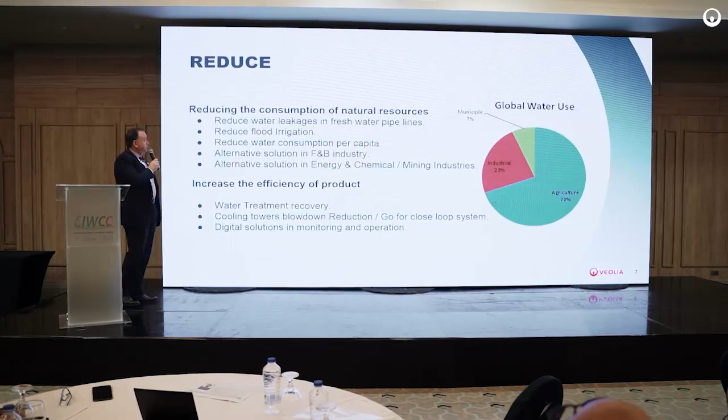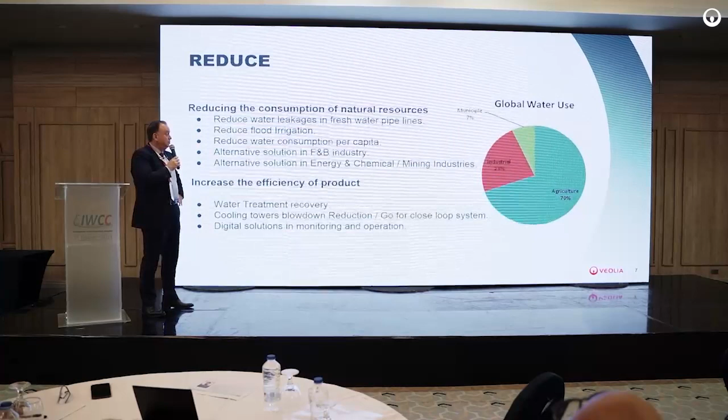So reduce, this is the old concept of water reduction, to reduce water consumption in the environment. So we have the old concept that there is a huge reduction if we stop the water leakage in the pipeline. If we use flood irrigation, we go to other technologies in irrigation, and reduce the water consumption per capita.

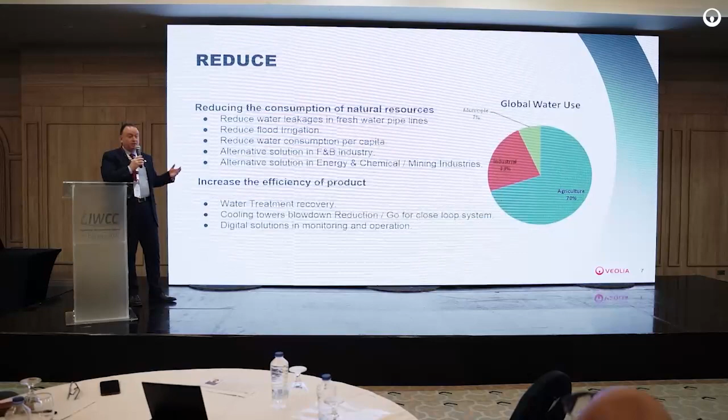There was a lot of discussion at the beginning of this seminar about where to go, 300 liters per day for a person or 150 liters per person. This is a major consumption of water.

Alternative solutions in the food and beverage industry, especially if we go to this chart, we will see that agriculture is consuming 70% of fresh water. Also, alternative solutions in energy, that is the oil and gas industry, chemical and mining industry, which is around 23% of global water use.

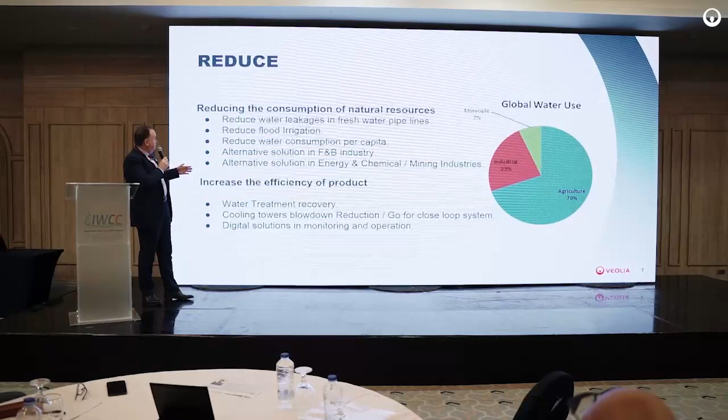So how can we increase the efficiency of the product? We are talking now about the development of membrane technology; we can now go for high recovery RO membranes, with which we can achieve around 90 to 92% water recovery.

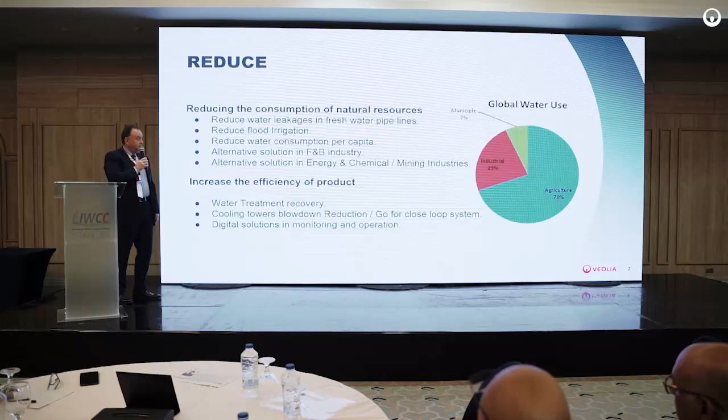One of the examples, which also has a huge consumption of water, is the cooling tower blowdown. With new technology, we can reduce the cooling tower blowdown, or we can go for a closed loop system. So this is another type of water reduction.

Now everybody is talking about digitalization. Digitalization is a good solution to monitor and to reduce water consumption. Next slide, please. Actually, it should be reuse, not reduce.

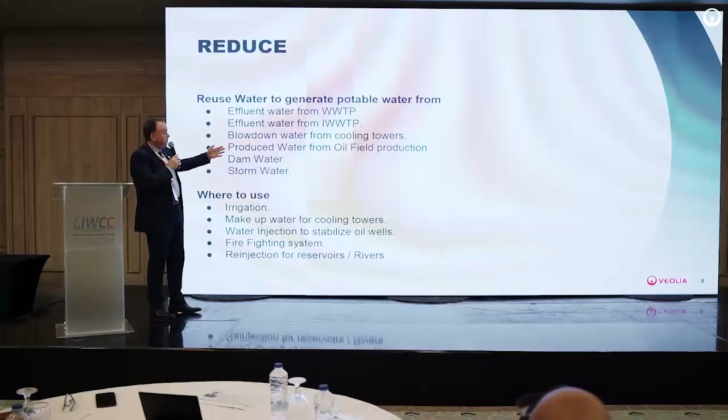So we can reuse water to generate potable water from a wastewater treatment plant. Municipal waste can be retreated to be used as potable water. Industrial wastewater can be treated to be reused. The blowdown from the cooling tower. I'm insisting on cooling towers because our area is a hot area, so using cooling towers in industry has a huge consumption of fresh water.

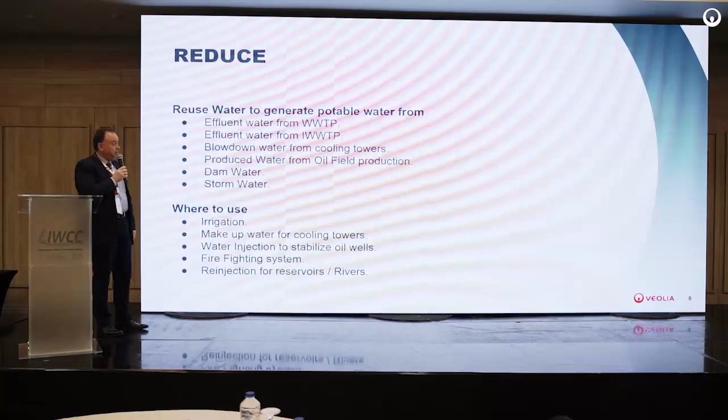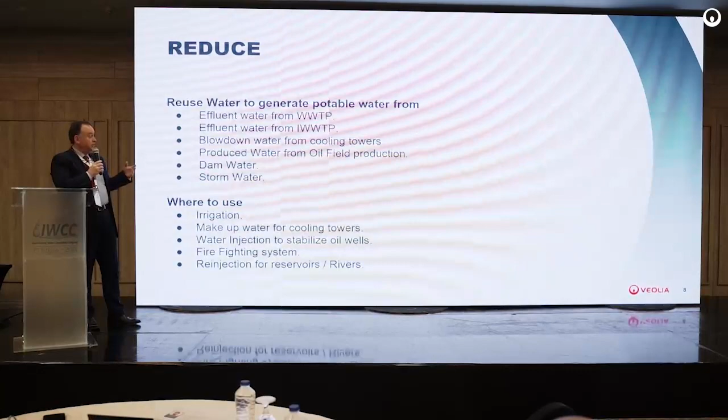So now, produced water from oil fields. As we know, the water cut for oil production is increasing. In some areas, the ratio between 1 barrel of oil and produced water is 1 to 4 or 1 to 7. So imagine if you are producing 10 million barrels of oil daily, you have around 40 million barrels of produced water you are wasting. So we can reuse this water in oil field operations.

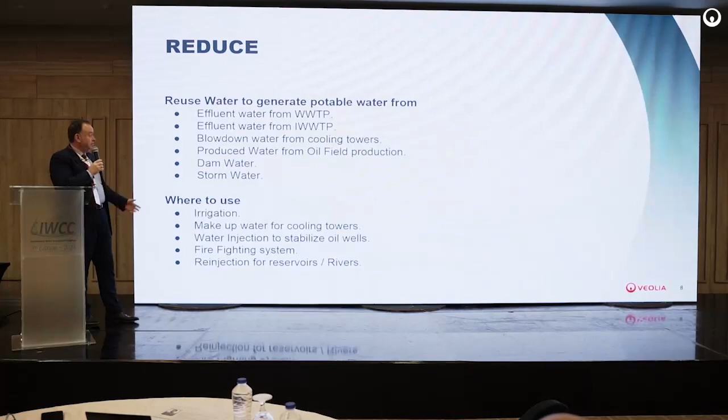Dam water is a good source of reused water. I'm coming from Saudi Arabia, so imagine, Saudi Arabia has huge dams, so they started treating the dam water to be reused as potable water as well.

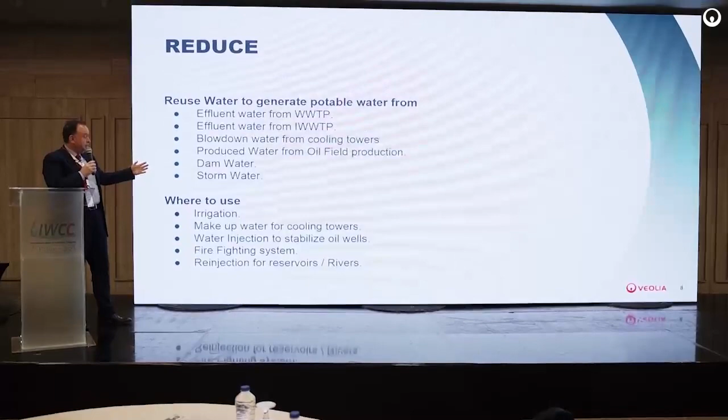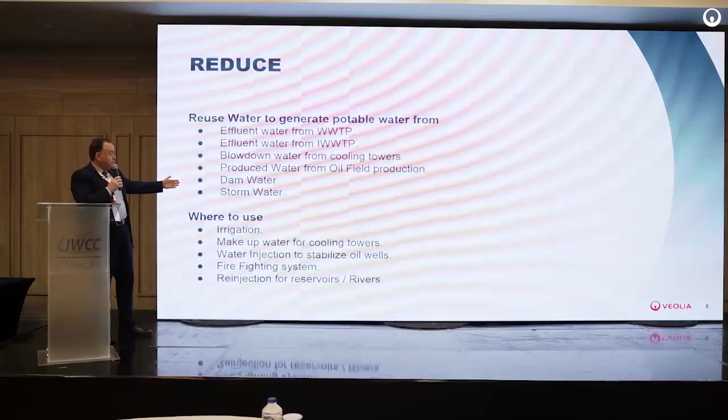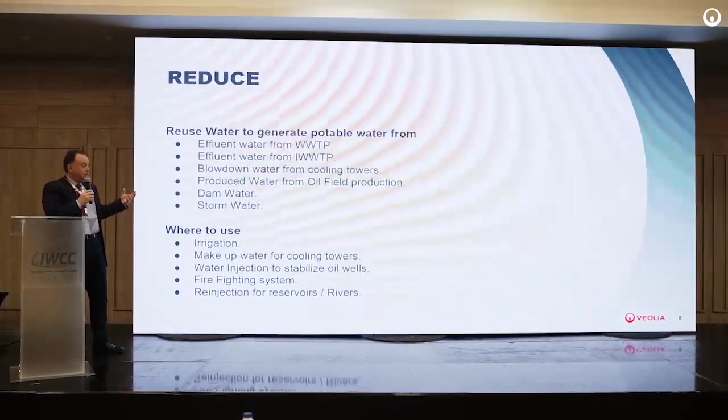Storm water, the collection of storm water, is also a source of reuse as potable water. So for the new development of cities, you can design the storm water collection system in such a way that you can collect, treat and reuse it as potable water.

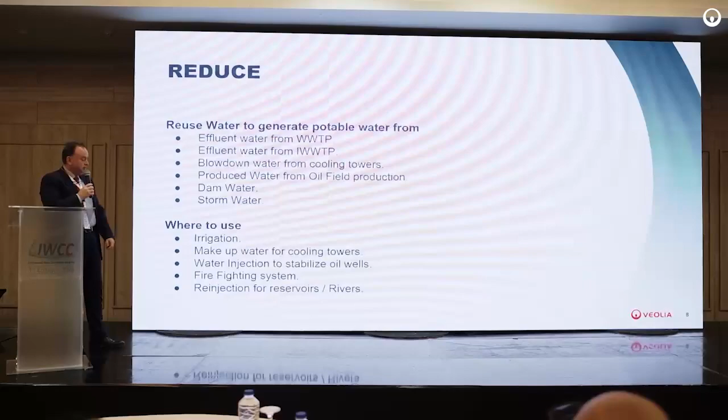We can use water in irrigation, as makeup water for cooling towers, water injection to stabilize oil wells, firefighting systems, and re-injection for reservoirs and rivers. Next, please.

So the new development in water reuse, we are talking about recycling. And by recycling, we want to achieve the zero discharge concept and introduce it in the municipal and industrial sectors. We will go through the difference between reuse and recycle in the next slide. But by recycling, we are re-inputting the water in the same cycle inside the same plant.

So we are not using fresh water to, for example, generate drinking water. We are using the industrial or the municipal water. We are treating it, then we can reuse it back as feed water for the demin plant, or as feed water to RO plant.

Also, the brine can be further treated through ZLD, zero liquid discharge, to have salt extraction. The new concept here, using the brine water from seawater desalination, is lithium recovery, which is a big subject nowadays.

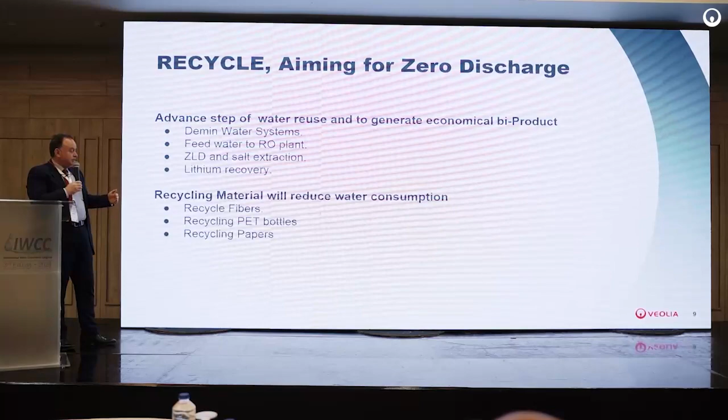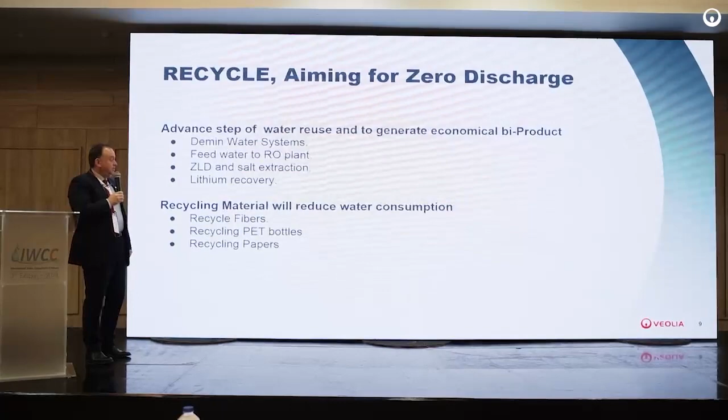Recycling PET bottles: you can also reduce water consumption by recycling PET bottles. Recycling paper. So we have two steps: recycling the water itself and recycling the solids, by which, by default, you are reducing water consumption. Next, please.

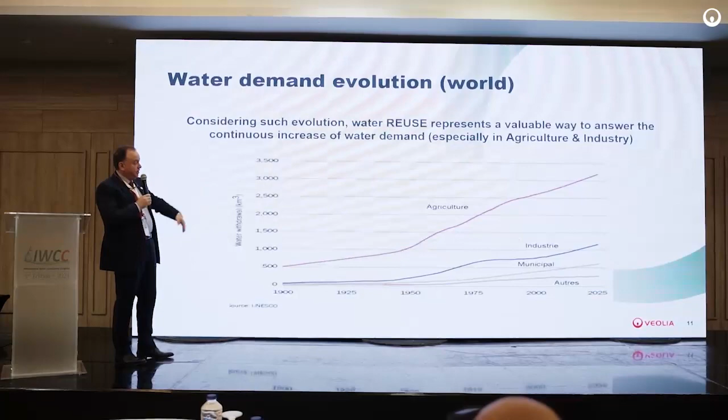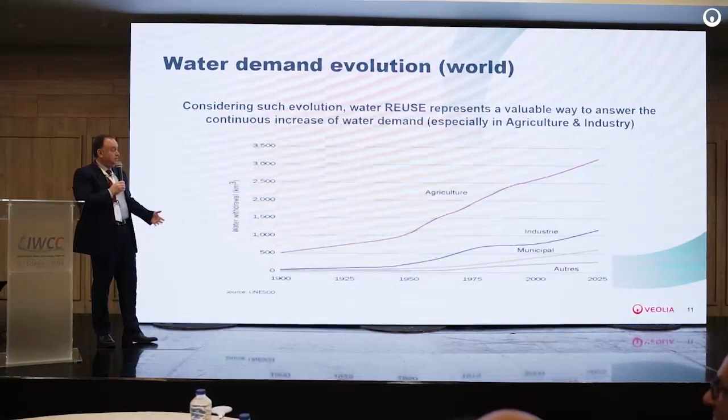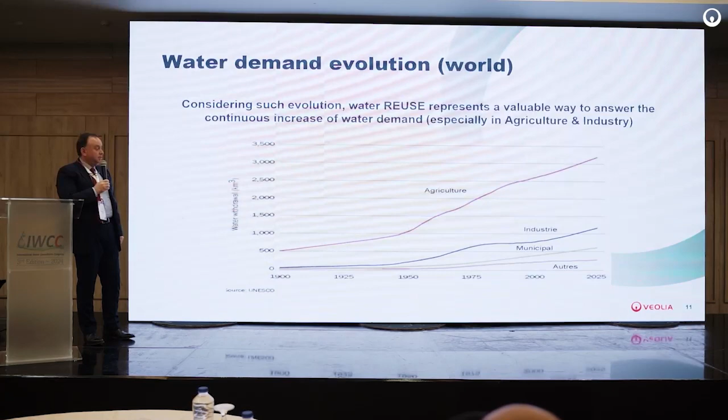So the natural resources are limited, and we have to find other solutions to introduce fresh water for agriculture or industry at least. Next, please. Especially when we are talking about the Middle East, it's a risk area for water shortage. So if we go for the concept of water reuse, we are reducing the impact on fresh water consumption.

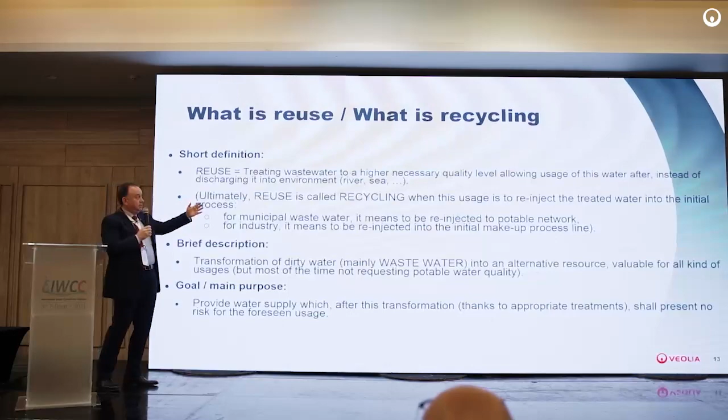Next, please. So this is the general definition. What's the difference between reuse and recycle? Reuse is treating waste to a higher necessary quality level, allowing use of this water. In recycle, we are not at the final discharge. It will be recycled back again and again.

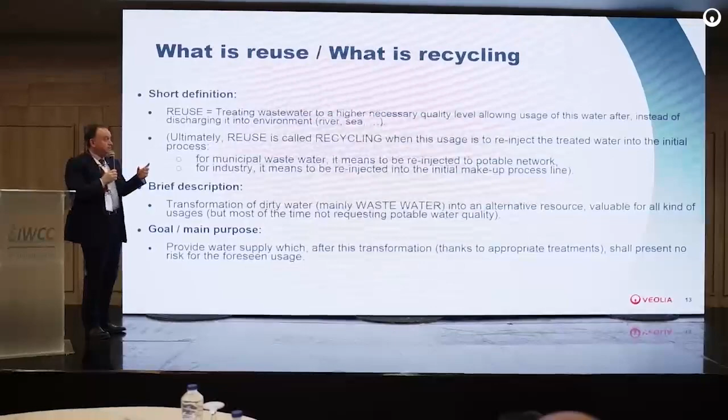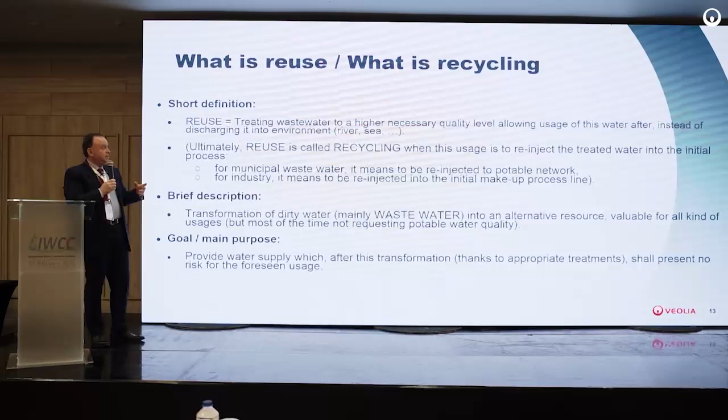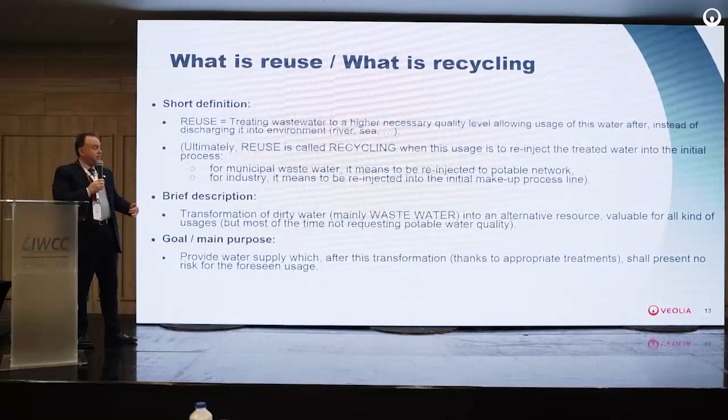So in reuse, for example in wastewater treatment, we are using the treated effluent for irrigation. But in recycle, we go for the next step, a further grade of treatment, to have the water recycled not once or twice, maybe 3-4 times.

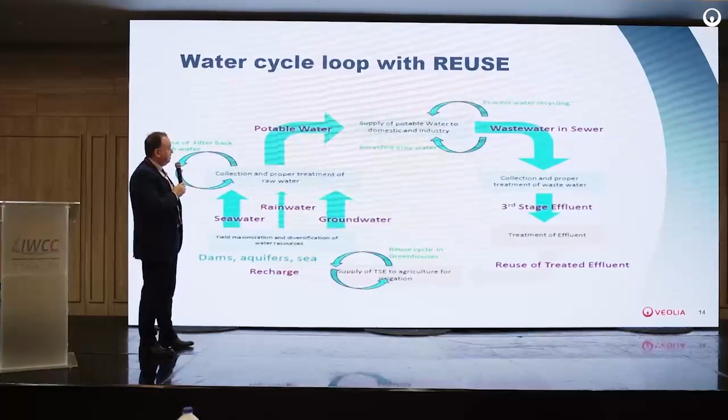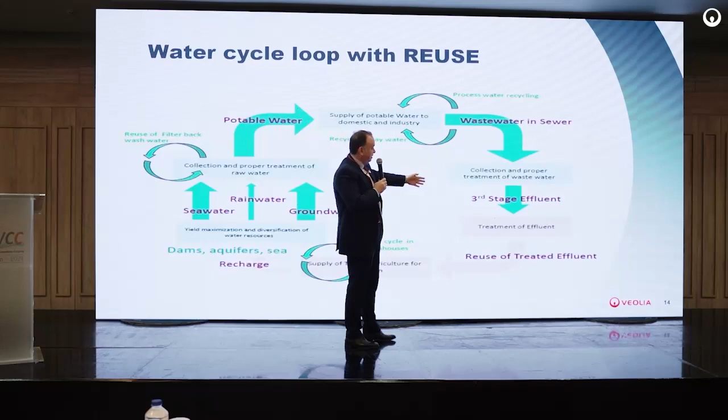So this is almost the cycle of water. Here, for example, from the wastewater treatment plant we are using grey water. The processed water can be treated so you can send it back to the potable water system. From the wastewater treatment plant, we can collect treated water to be used as a third stage in the industrial system. So it's a complete cycle of water reuse.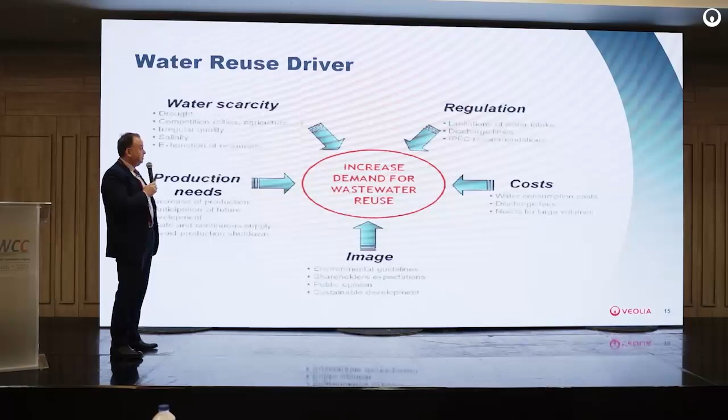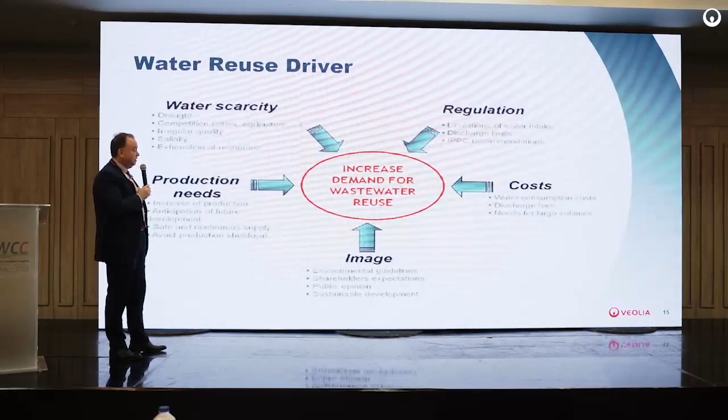Three minutes, please. Okay. So, water reuse drivers. We have water scarcity; this is one of the major drivers. Production needs have increased, as we explained in the previous slide. There is an increase in agriculture, industrial, and municipal regulation. So if there is a regulation, water reuse will be a must.

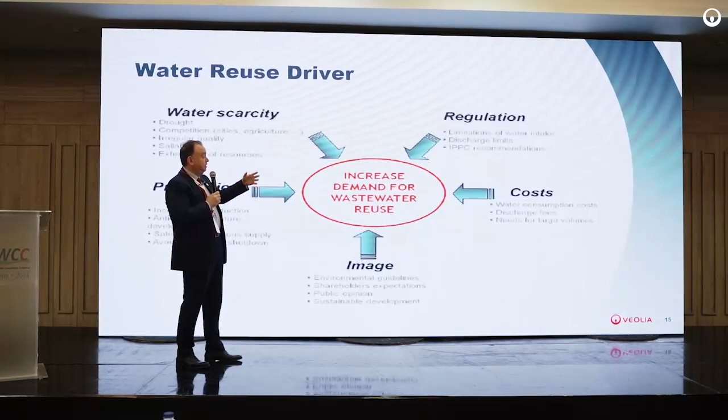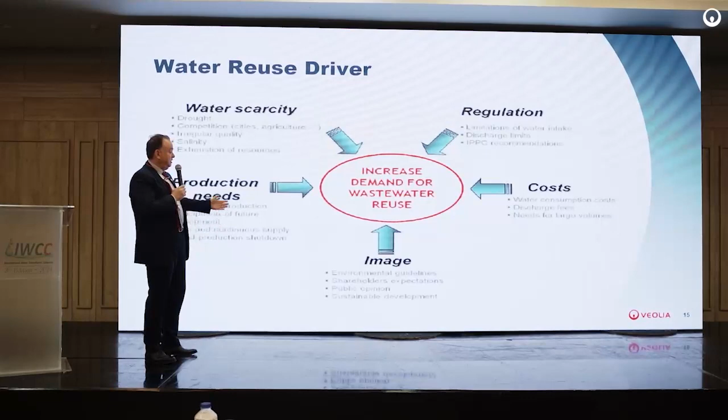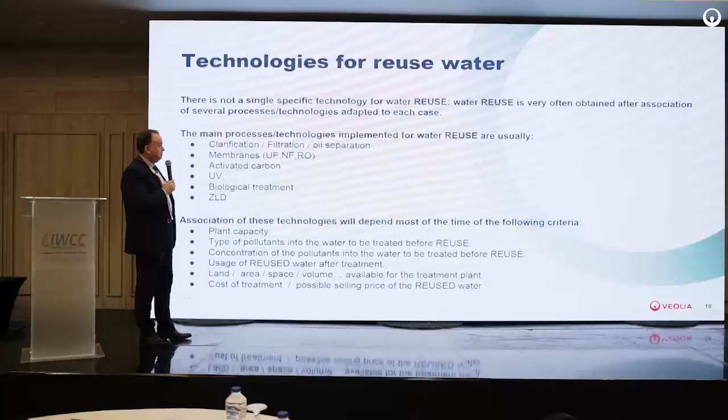Next, please. Next. No, not this slide. Please.

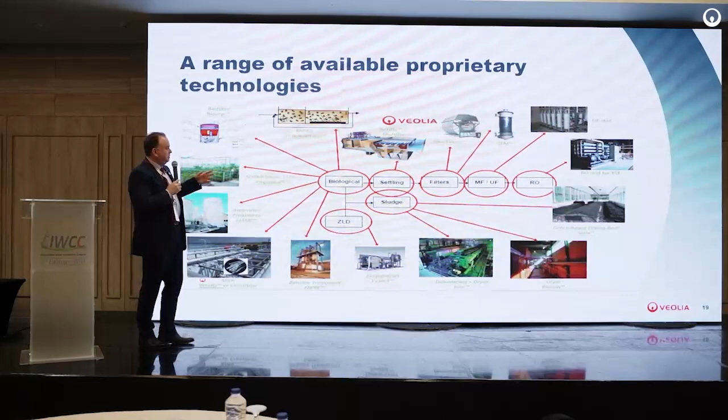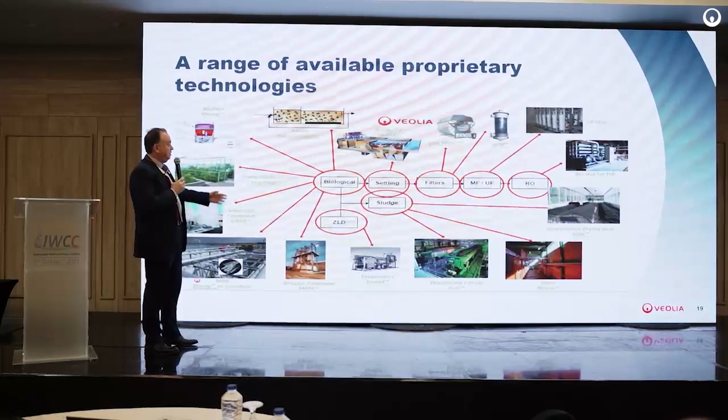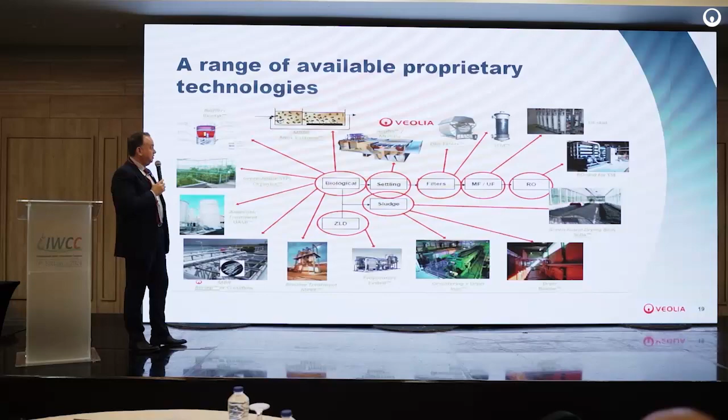Next slide. So these are different technologies for water reuse. We have biological treatment, settlement, filtration, ultrafiltration, RO, sludge treatment, ZLD. These are general technologies which Veolia can introduce for different steps of reuse and recycle projects. Next, please.

If you have your own recycle system, you don't have any operational risk if you face any shortage of water supply or flooding. Also, regulation is very, very costly. I know some petrochemical complexes have been stopped in operation, with millions of dollars in penalties each day, because the water discharge was not matching the requirements. Next, please.

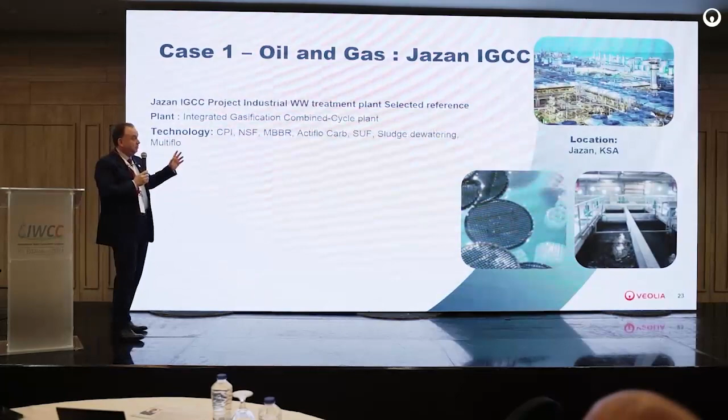Time. Okay, please. Time. Okay, just next slide quickly, please.

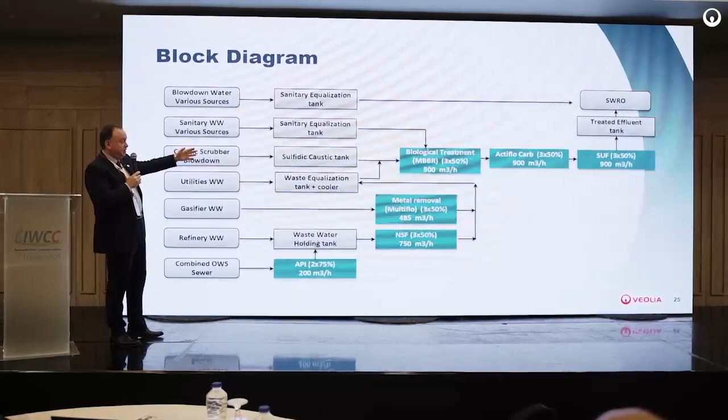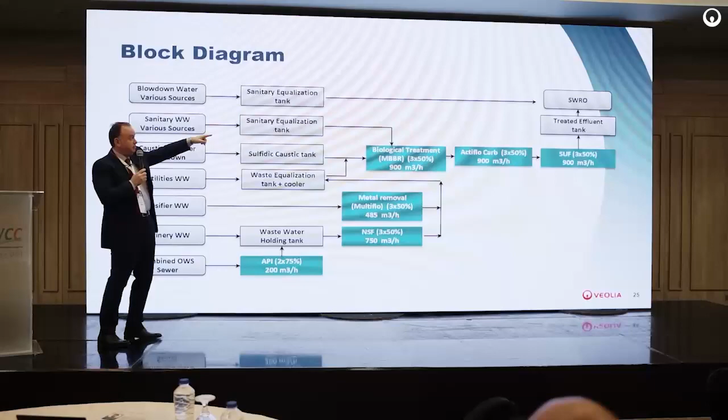Next slide. So I'm proud to introduce this project. This is 900 cubic meters per hour for one of the refineries in Saudi Arabia. We have a complete water treatment system, until it goes back as feed water to a seawater desalination system.